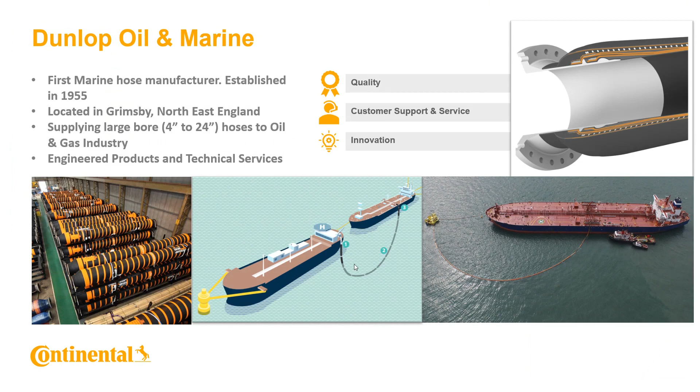Oil and gas is everywhere, supporting our daily life. We use it as fuel, lubricants, coatings, as well as feedstock for fertilizers, road building, waterproofing, and lightweight materials. They enable and empower us for many activities, functions, and comforts.

According to a survey in 2016, on average globally, 0.5 gallon of oil is consumed per person per day. And from a Clarkson's 2022 report, 17% of natural gas and 64% of oil produced globally moved by ship.

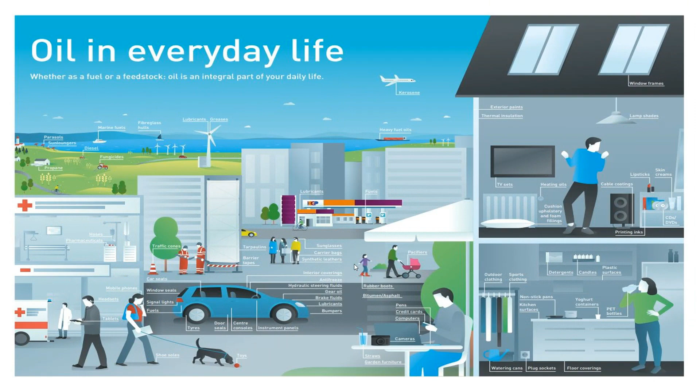So how are oil and gas being transported by sea? From offshore to onshore facility in relatively calm, protected, and shallow bay areas, conventional buoy mooring systems are used. The submarine hose sits normally connected to the pipeline end manifold pump and lays on the seabed. It is picked up on board for offloading when a tanker arrives.

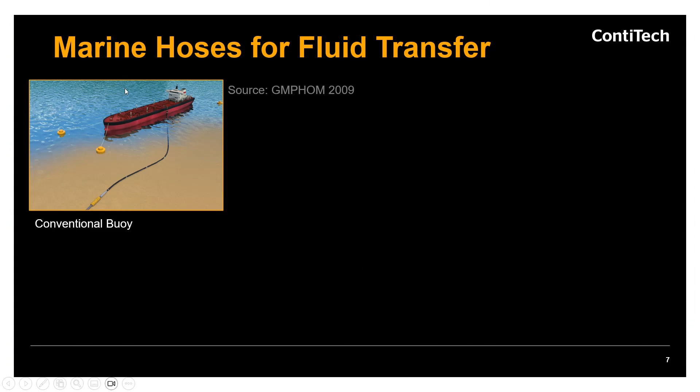In deeper and rougher sea locations, single-point mooring systems are used. Floating hose deliver oil from the tanker to the buoy, and then submarine hose transfer it from the buoy to the fixed pipeline on the seabed, which is connected to our onshore facility.

These marine hoses stay in the sea throughout their service life, 5 years, 10 years, or even 15 years. They have to withstand the elements of the ocean: wave, tide, wind, temperature, even hurricanes and earthquakes.

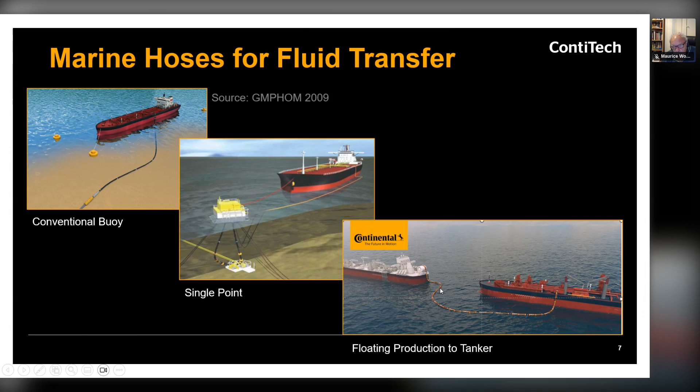Marine hose also offload oil from floating production facilities to tanker. So floating production facilities typically stay in remote or deep water locations where fixed platforms are not suitable.

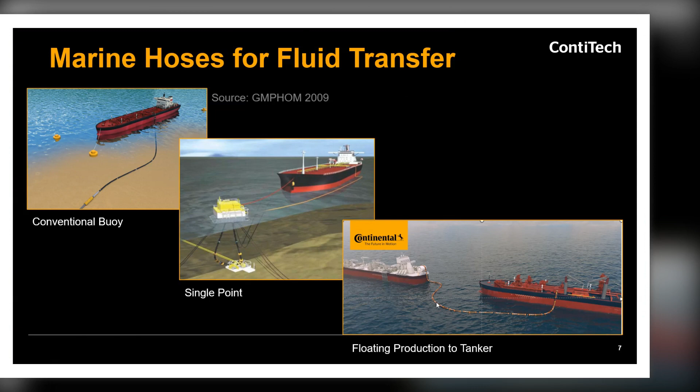This is an example of a single point mooring system. Oil is transferred from the tanker through the floating hose to the buoy, and then by submarine hose to the pipeline end manifolds, to an offshore pipeline, and then an onshore pipeline to onshore facilities. The vessels stay in the buoy swing circle while oil is being transferred.

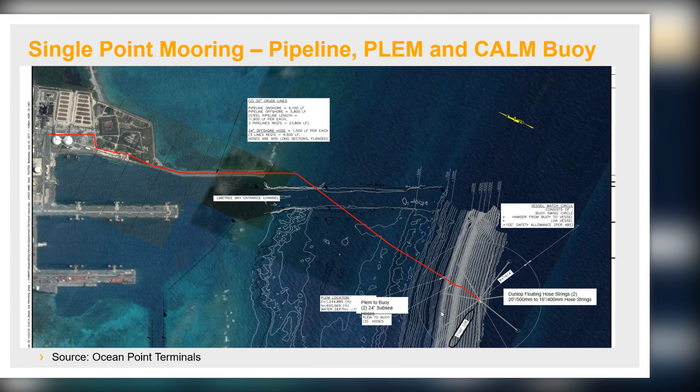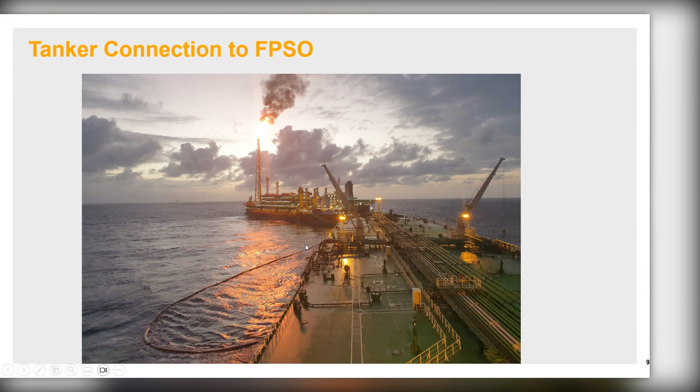It is, however, not all operation just the same as before. Climate change means that our ocean environments are becoming more hostile. We are increasingly seeing single point mooring systems rather than conventional buoy systems. Our hoses are meeting higher specifications in strength and fatigue than ever before.

Hydrostatic and hydrodynamic studies are carried out in the design stage to design a system that performs in the environment, to minimize forces in the system, and to define the hose reinforcements.

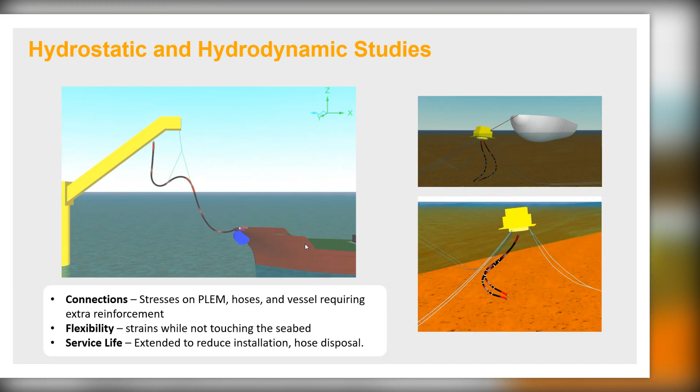The Oil Companies International Marine Forum, OCIMF, and the American Petroleum Institute, API, and other bodies, for example in defense, have guidelines or standards on technical requirements and qualification tests for oil transfer.

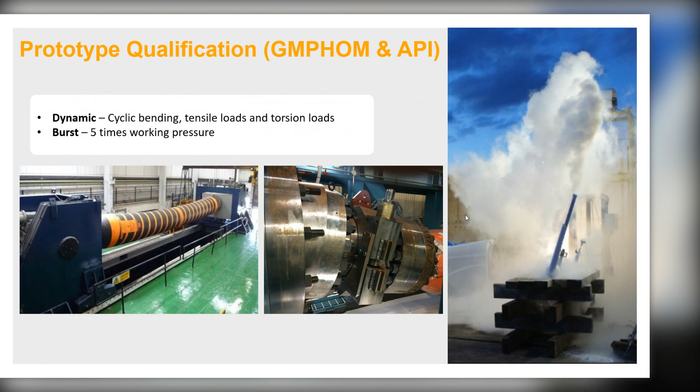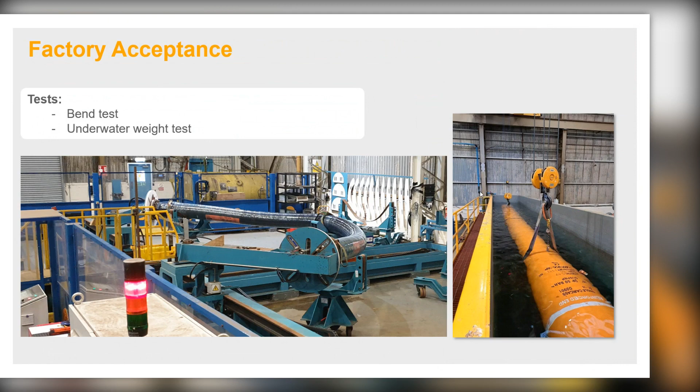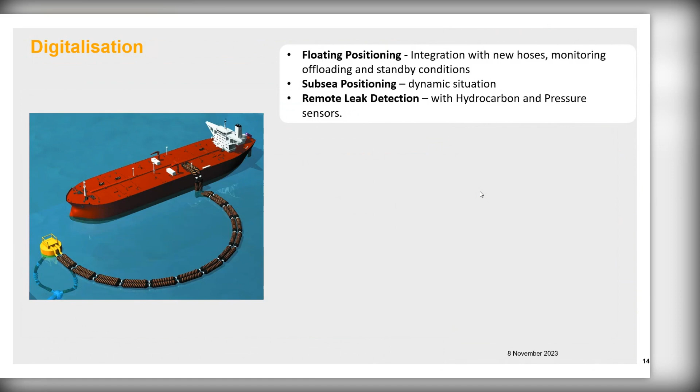Technology is also now at the stage where we can do remote health monitoring of floating systems through clever use of sensors. This can help to optimize offloading schedule, service periods, and system design. Full history available will enable machine learning, more timely actions in the future.

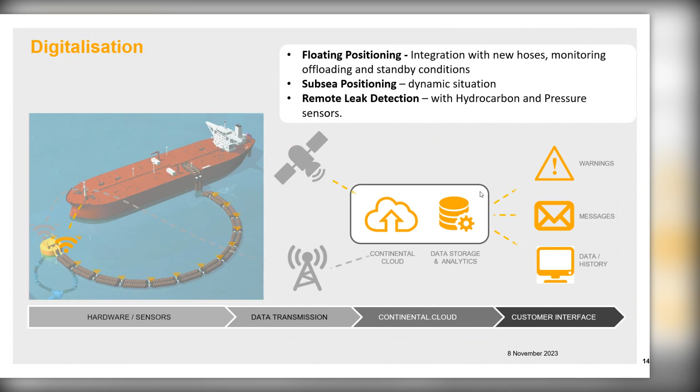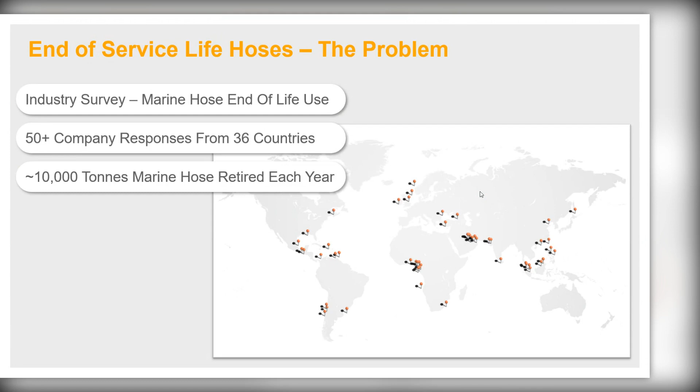As a marine hose manufacturer, we are regularly asked by customers as to what can be done with old hoses. So, a few years ago, we conducted a survey with marine hose users, and we got over 50 responses from around the world. Based on those responses and the market size, we estimate that there is about 10,000 tons of marine hose being retired from service every year, and this is equivalent to the weight of 70 blue whales.

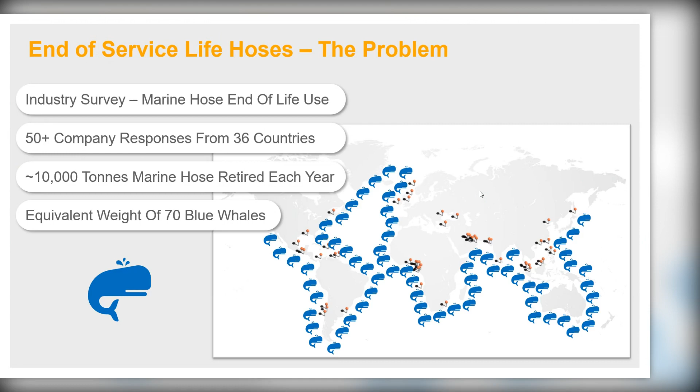The historic model for product consumption was to take raw materials, make the product, use the product, and then dispose the product. Start again.

The Paris Climate Agreement and the drive for carbon neutral is challenging that historical model, and we need to find more sustainable ways of consuming products.

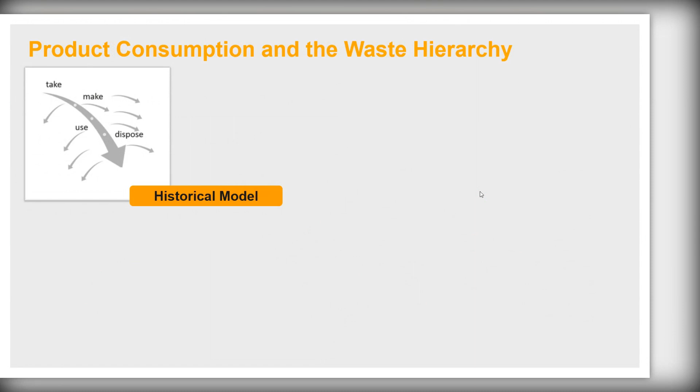Now, the desire is to set up a circular economy type model, whereby products are reused, remade, or recycled rather than going to landfill. This is what manufacturers and customers have to work towards if we are to achieve carbon neutral in the coming decades.

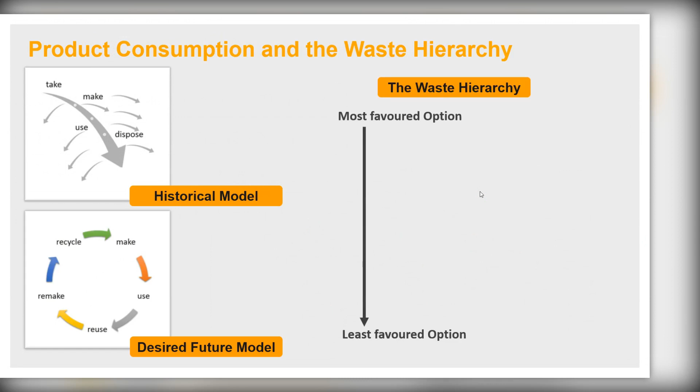Another model I'm presenting is the waste hierarchy in terms of disposal in an environmentally friendly manner. There is a preference to disposal, from reducing consumption through to sending to landfill. And I use this to discuss marine hose disposal options.

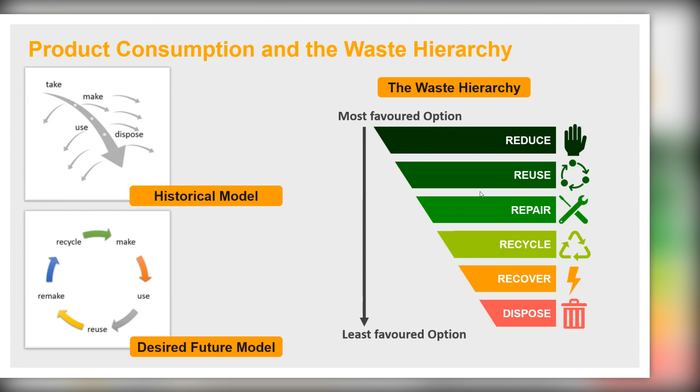So the most preferable option on the waste hierarchy is to reduce consumption of products, using fewer marine hose. Well, it seems strange for a hose manufacturer to suggest using fewer hoses, but I shall explain. There will be several lengths of hoses required in a system, but we can optimize the service life of the hoses to be purchased, optimize the cycle time so that over a period there will be fewer new hoses purchased in the first place that at that point will need to be disposed of.

How do we do that, you may ask? Some examples: consider using API 17K hoses for subsea systems. 17K hoses are designed with greater capacity and longer fatigue lifetime, allowing much longer service period before change out.

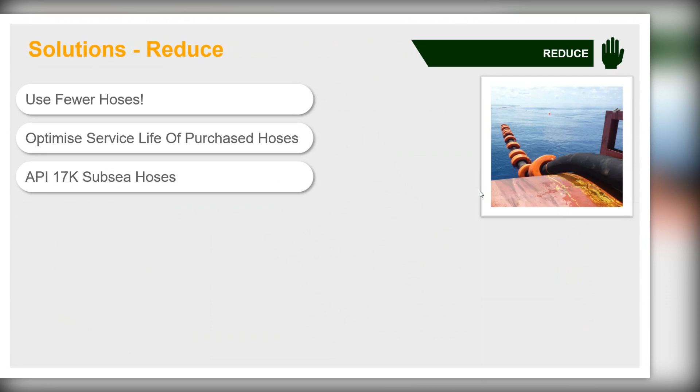Double carcass hoses have been around in our industry for years.

But they provide the extra reassurance and risk reduction when seeking to optimize service period for each floating hose position.

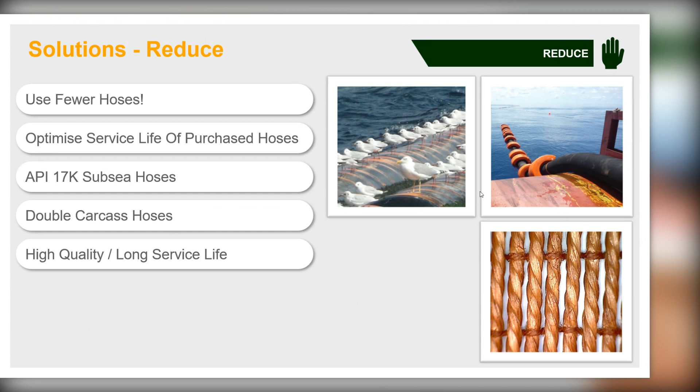Choose proven hoses with high quality and fatigue-resistant material. Look at the overall life cycle cost rather than initial purchase price.

Also, remote health monitoring of the hose system through clever use of sensors and digital technology. This can help optimize service period and system design.

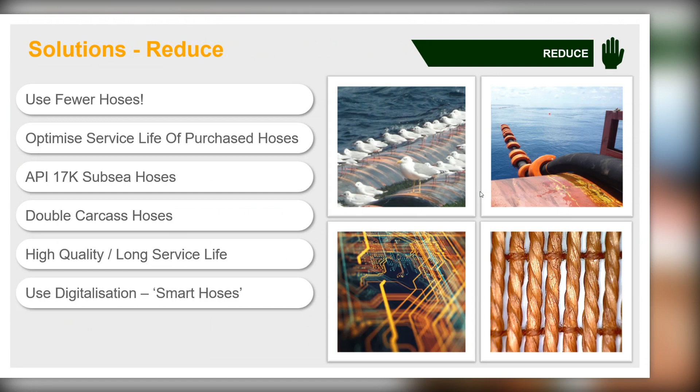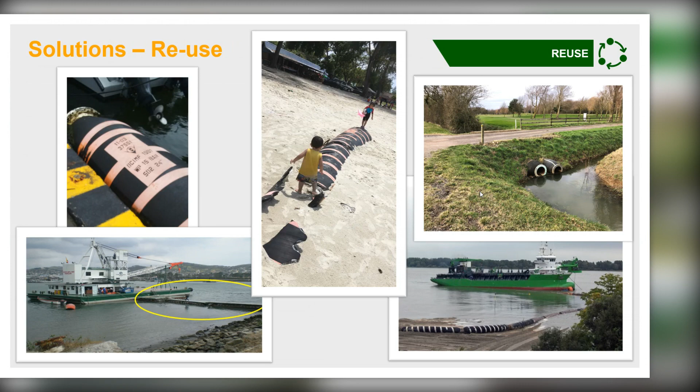Next on the hierarchy is repair. It is about keeping the hoses in service. As per OCIMF recommendations, have a good maintenance inspection program for the hoses.

To optimize hose service life, we recommend, if possible, that condition-based assessment is followed rather than time-based. Asset management software will also help to keep track of hose conditions and field test results.

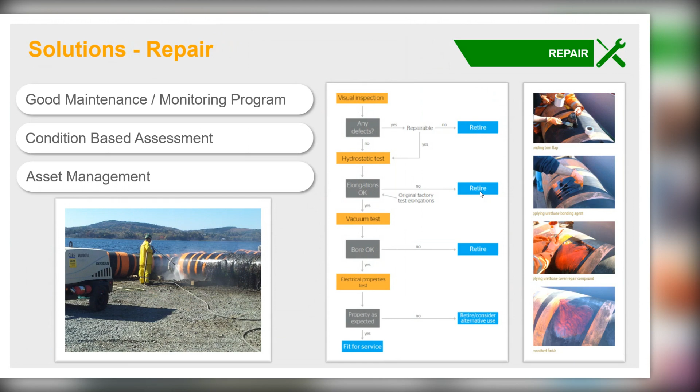When hoses are finally retired from service and we can't find a second use for them, we consider ways to recycle. Marine hoses are not easy items to deconstruct because of their composite, multiple layer structure. How do you do it? There are a number of technologies employed for recycling tires, and some of them are applicable for marine hoses.

The two showing most promise for marine hose application are mechanical and thermal. Mechanical can include cutting, tearing, shredding, and jetting. Thermal covers techniques like pyrolysis.

Unfortunately, the makeup of the hose will require a number of these processes to break down one single hose into its constituent parts that can potentially be reused into other products.

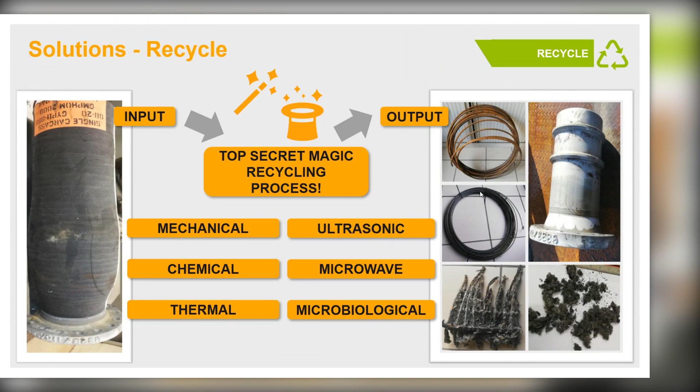Last, we look at burning the hoses, as the carcass, similar to tires, has high calorific content. They can generate heat and power.

The pyrolysis technique can recover the carbon black from the rubber compound and recover oil and gases, leaving the steel component to be recycled.

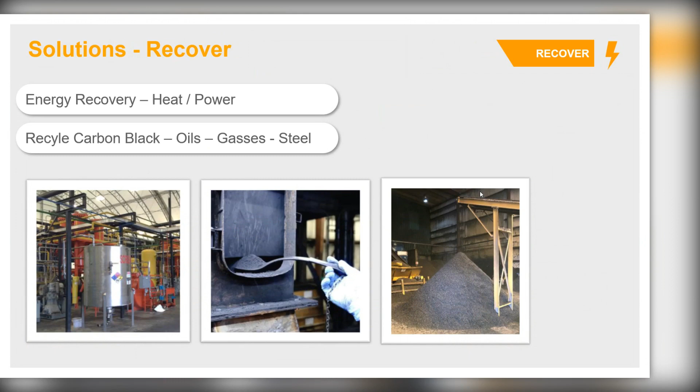And yet, much more changes are happening for the longer term. We can be shipping more and more liquefied gases than oil-based products. They can be transported from shore to sea instead of from sea to shore.

Looking at the trend in the energy market, oil demand is set to peak in 2029, while natural gas is to maintain for some time.

Providing decarbonization across industry, the renewable sector is growing fast, which presents challenges but also opportunities. Green sources of energy are being sought, and hydrogen is being considered as a clean source. Then, transportation challenges with hydrogen result in interest in ammonia.

The pressure to decarbonize is also generating a market for carbon dioxide to be captured and stored.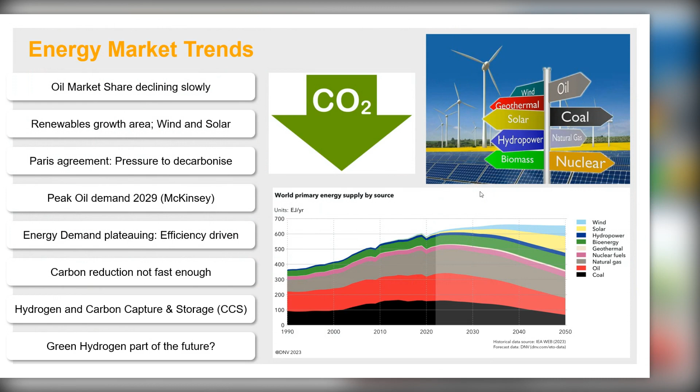The idea of carbon capture and storage is to collect the carbon emissions from major industrial sites, compress and cool them into liquid, and then transport them by pipeline or ship to offshore locations.

Then they are injected into depleted oil and gas fields or aquifers. Gigatons per year of carbon dioxide will therefore be taken out of the Earth's atmosphere.

Large-scale carbon capture and storage is still at an early stage of development, but the International Energy Agency is saying that it will be virtually impossible to meet global climate targets without using this technology.

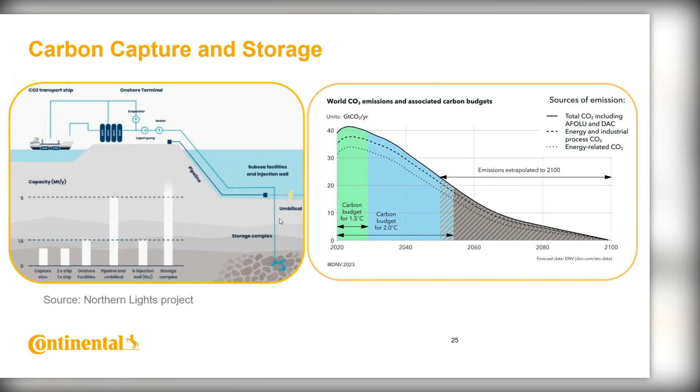The scale-up knowledge, effective techniques and equipment developed over decades in the oil, gas, and chemical industry are most closely related to carbon capture. We are now actively leading the development.

Meanwhile, hydrogen and ammonia are projected to be the important green fuel in 2050. Hydrogen is generated from water electrolysis using green energy from wind, solar, or hydropower, and ammonia acts as a carrier of green hydrogen. We have a lot to do to realize it.

Our industry and government are investing and pushing the development of technology and infrastructure.

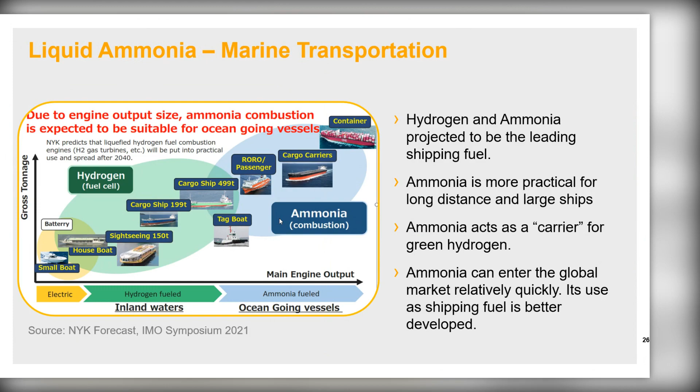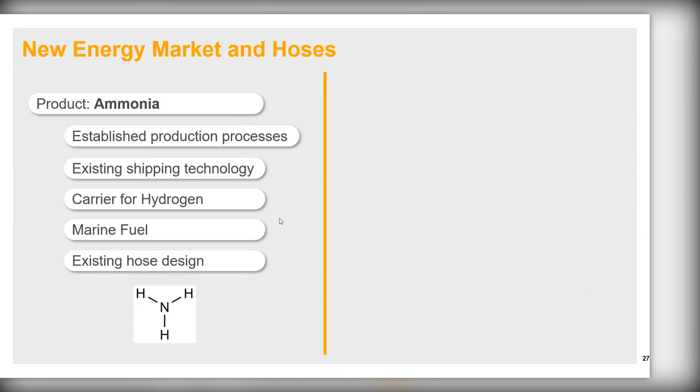Ammonia is easier to transport in liquid form, as dense hydrogen requires either very high pressures or very, very cold temperatures. The carbon capture and storage industry is planning to use marine hoses to transfer liquefied carbon dioxide from the transport tanker to the depleted offshore reservoir for storage.

So interest is growing in the market for marine hoses for both ammonia transfer and the transfer of liquefied carbon dioxide.

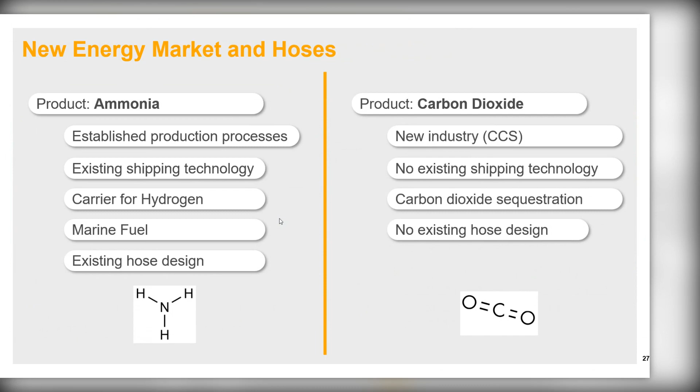There are many design and operating requirements for liquefied gas hoses that are different from hoses designed for handling crude oil or liquefied petroleum products.

As highlighted in GMPHOM 2009, liquefied gases are kept at low temperatures with high ice formation risks. They are subject to temperature and pressure cycles. When the temperature increases, they permeate and expand readily. The guidelines, however, do not specify the method to quantify the performance.

There are currently no standards for liquefied carbon dioxide hoses, and ISO 5771 can only be applicable to small bore ammonia hoses less than 3 inches. Ammonia is toxic and currently restricted as a marine fuel.

Liquefied carbon dioxide hose will be rated for 40 bar, while oil marine hoses are normally 21 bars. For liquefied gas, it can have phase change and expand.

So a can of liquefied ammonia can turn to ammonia gas enough to fill a barrel, a drum, at minus 33 degrees C. It can happen very quickly if there is a good supply of thermal energy, and cause rubber blister and damage. Phase change, therefore, must be mitigated and controlled in liquefied gas applications.

While there is a very small amount of liquid changing phase, we relied on the composite ply structure to restrict the internal expansion.

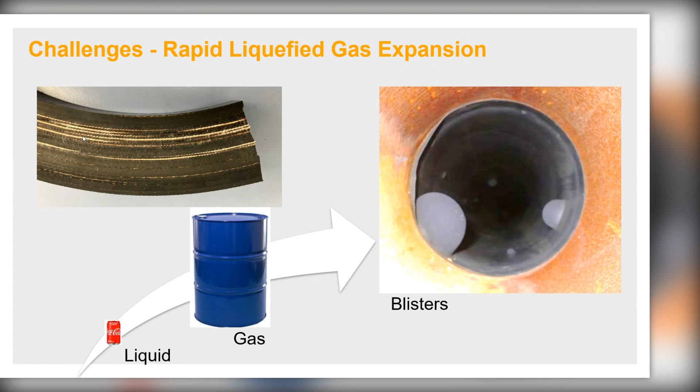The liner material is critical in limiting the fluid concentration inside the whole composite structure, because any outer layer in the structure cannot have a higher concentration than the liner.

Fluid can only move from high concentration to a lower concentration, while the rubber still provides flexibility to cope with the dynamic marine conditions. We know that it will be more and more challenging and demanding as bore size increases.

We utilize our decades of know-how on marine hose structure strength requirements and large bore composite ply structure on the new designs.

To give ourselves and our customers the confidence, we have to test our hose material and design in representative conditions. The only option is to have our own test unit installed and run at our Grimsby site, at the back of the factory.

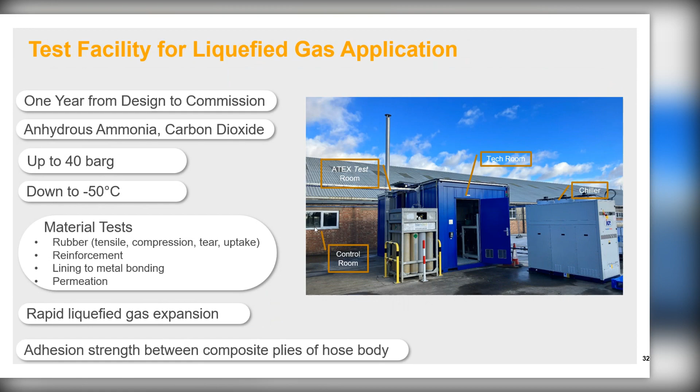Each test vessel can be independently temperature controlled, started up and shut down. We aim to run all 7 test vessels at the same time, 24 hours, 7 days a week, to meet the customer's schedules.

Like engineers everywhere in the industry, we have a busy time ahead for many years to come to enable green energy delivery to the world's population.

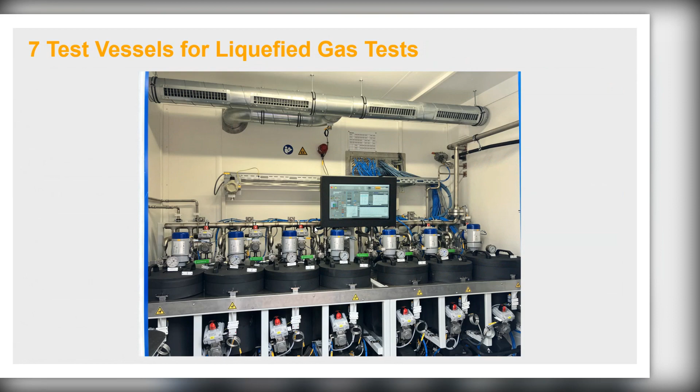Our marine hose development program, therefore, comprises multiple teams working in parallel: material development, design, testing, simulation, manufacturing techniques, economies of scale, quality control. They are all interlinked.

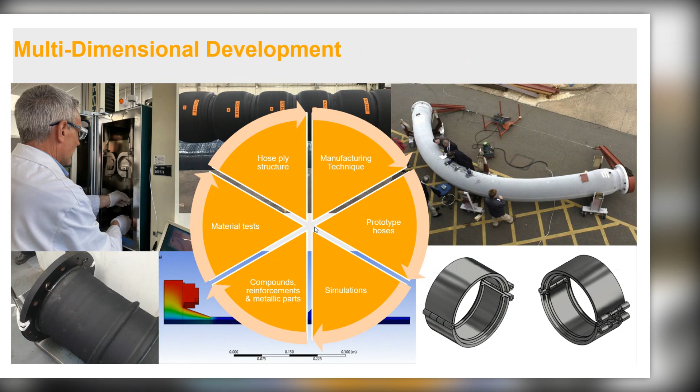Today, I have provided you with an insight into the advancing oil and gas operation and our ambition for the future. Marine infrastructure has been successfully moving oil across oceans for many decades.

We want to do the same for the future green fields: large-scale, safe and durable, low-temperature, pressurized transportation.

There is a climate emergency. Still, we must get everything right. We are approaching the challenges with innovation in engineering and science, material and manufacturing techniques.

We invest in leading-edge test facilities, our people, and our knowledge. We utilize our expertise, our experience, explore new options, and learn from other industries. Engineers are therefore working tirelessly to cover all aspects required for achieving a net zero future.

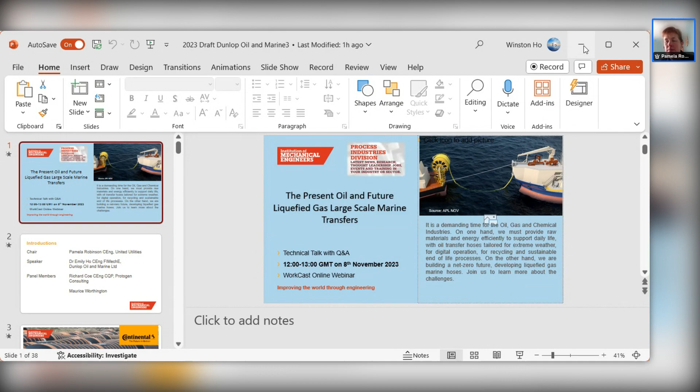Hold on, let me just stop sharing first. If we can have the other panel members on the screen, if they can make themselves visible, that'd be appreciated. So Emily, what levels of internal pressures and temperatures are your hoses rated to?

We are rated for liquefied carbon dioxide at 40 bar and down to minus 50 degrees C. For ammonia it's 25 bar and down to minus 33 degrees C. Thank you.

But that's more than what they're currently rated to now, I got from your presentation. Yes, that is more than - the pressure is higher than what we normally use now, which is 21 bar, and we do not normally go down to minus 50 degrees C.

Thank you. Also asking about the material of your hoses - I'm not sure if you're able to divulge it. It mentioned something about top secret on your slides.

The material: we have a rubber liner, which is a barrier liner, so it won't allow ammonia or carbon dioxide to go into the inner part of the hose. Then there will be a layer of reinforcement to make sure it can still handle fatigue, tensile and torsion. We have embedded spiral wire to withstand internal and outside crush.